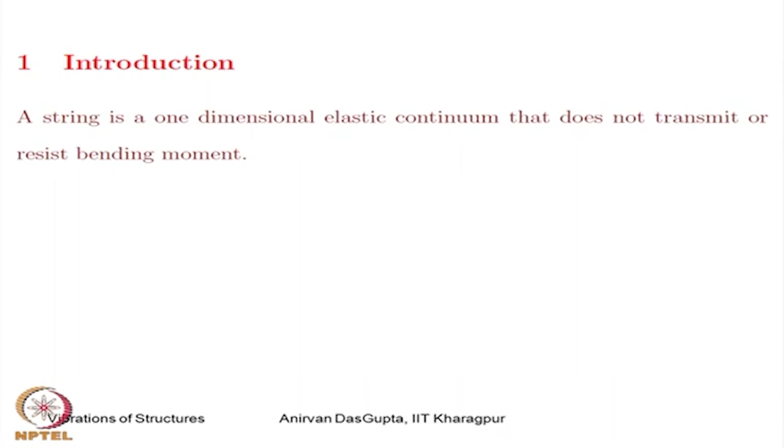Now I will show you some examples of strings. This is an ordinary tag which is like a string because it satisfies the definition I gave you: it is a one dimensional continuum and does not resist bending in any way. Whatever shape I give it, it will retain that. The restoring force comes when I make it taut. This tension that I give to the string acts like the restoring force. So the restoring force is produced by the tension in the string, otherwise the string will take any shape. It does not resist bending.

This is another example of a one dimensional continuum that also does not resist bending. This is a chain, a hanging chain, so this also qualifies to be a string. Here is a guitar string. Now, if I bend it, it restores back, as you can see here, but still this is called a string.

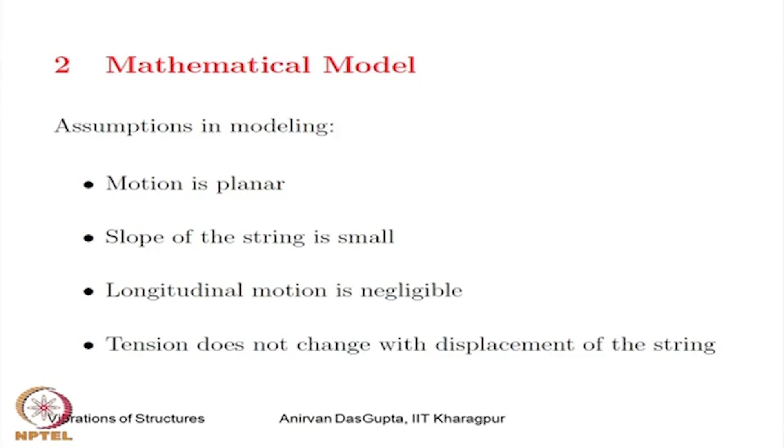So we start with a mathematical model. How do we model strings? In order to model strings, we will make some assumptions. Here I have listed some of the assumptions we make in modeling the string. The first assumption says the motion of the string is planar - I will assume the string vibrates only in this plane. Then, the slope of the string is small. So when the string deforms, the slope at any point of time is small.

The third assumption says the longitudinal motion is negligible. If we make a mark here and trace its motion as the string vibrates, you will find most of the time this mark moves transverse to the string. There is hardly any axial or longitudinal motion. This is our third assumption. The fourth assumption says the tension does not change with displacement of the string. So I have put some tension in the string, and as I displace it, the change in tension is negligible. With these assumptions, we can now start modeling our string.

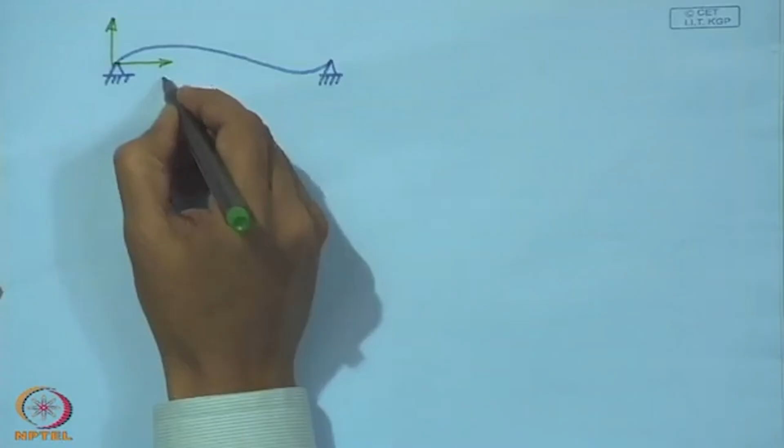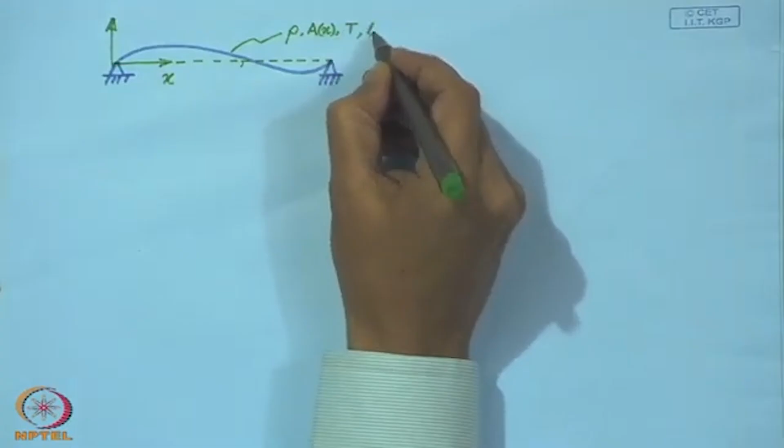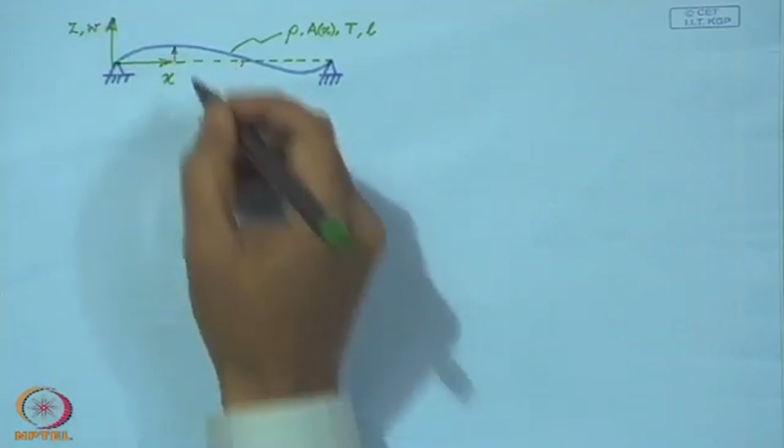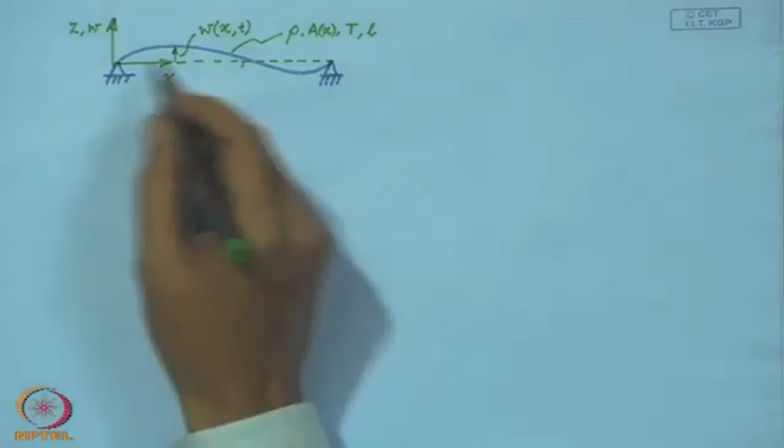Consider a string made of a material of density rho, having an area of cross section which may be a function of the positional coordinate x. It is under a tension T and has a length L. This transverse motion of the string is measured by the variable w at a location x at a time instant t. This shows a stretched, taut string which has been displaced from its equilibrium position, which is the x axis.

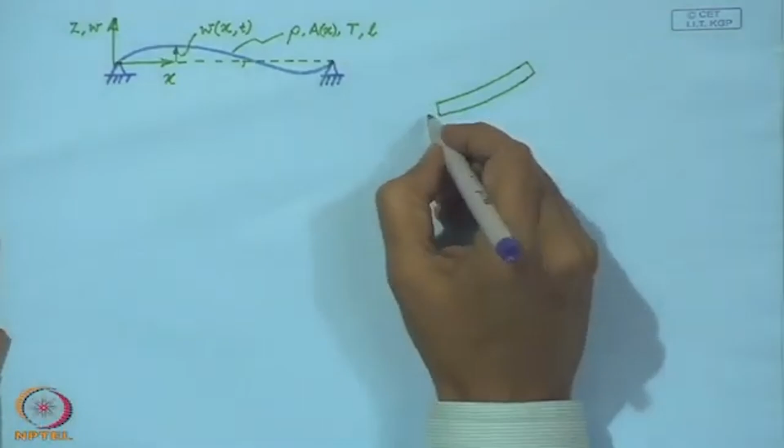Now, to write out the equations of motion, we will consider an infinitesimal element as we do in Newtonian mechanics. We will draw the free body diagram of this infinitesimal element. This element lies between the coordinate x and x plus delta x.

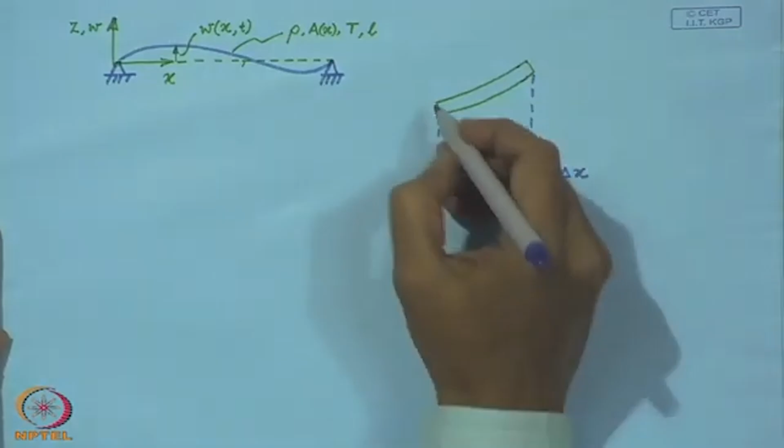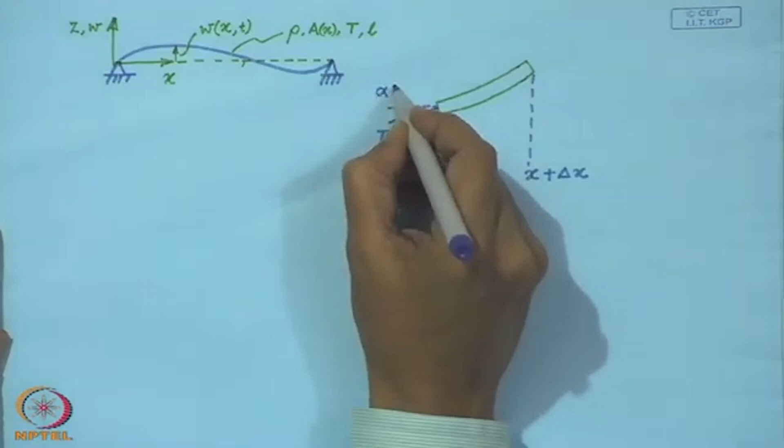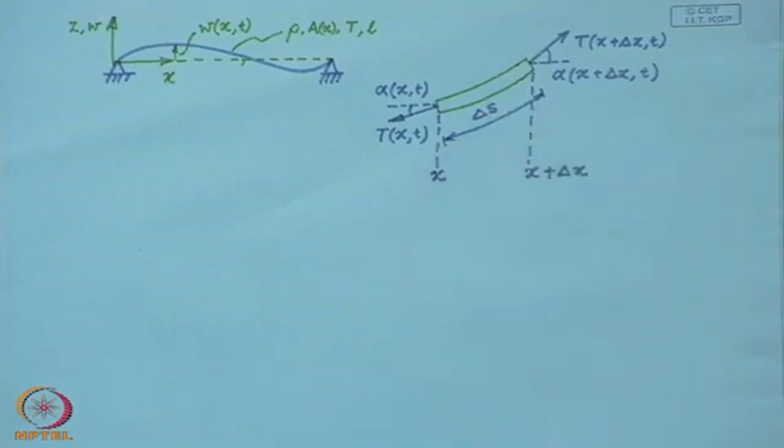On the left, it is under a tension T(x,t), and it makes an angle alpha. On the right end, the tension is T(x plus delta x, t), and the angle it makes is similarly alpha(x plus delta x, t). The stretched length of this element is delta s. Now, to begin with, we are going to write the equations of longitudinal dynamics of this infinitesimal element.

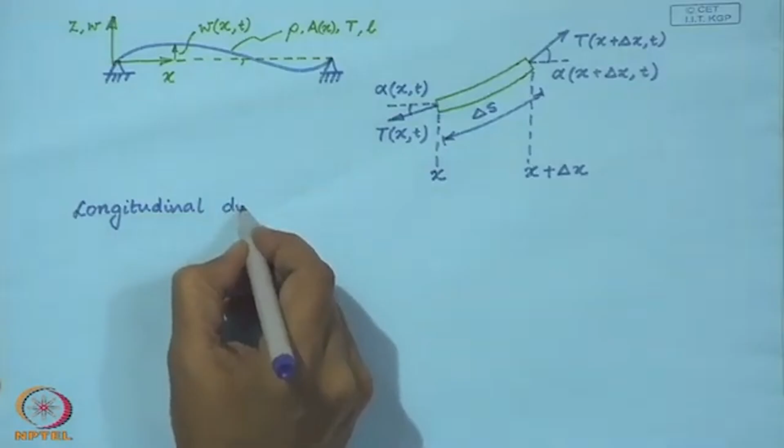Now, as we have assumed that the longitudinal motion of this element is negligible, we will neglect the inertia force, that is the acceleration in the longitudinal direction. So then the longitudinal dynamics reduces to just a force balance equation in the longitudinal direction. Let me write out this force balance equation.

So, is the tension at this right end, cosine of the angle, minus the tension at the left end times the cosine of the angle.

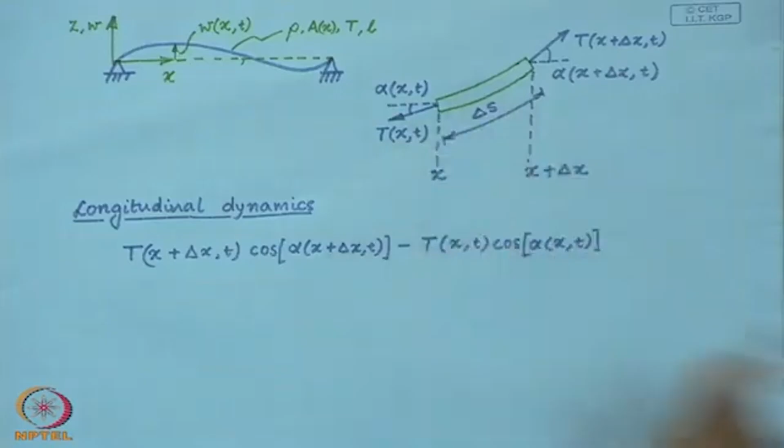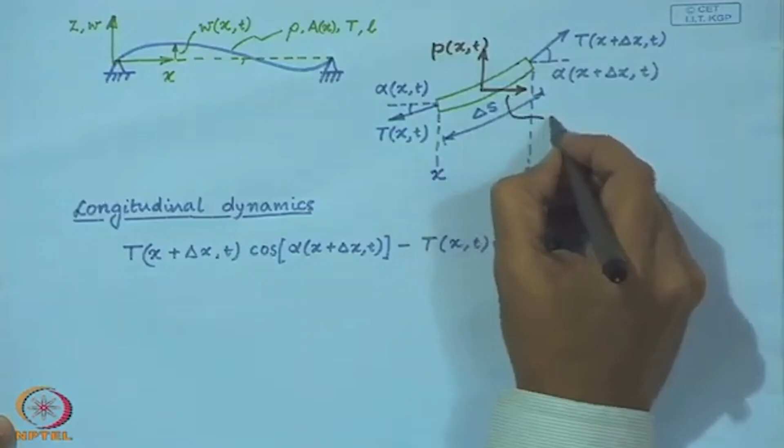And along with this, you may have some external distributed forces. So you may have some external force distributions as I have indicated here. These are force per unit length of the string. So in the longitudinal direction I have, for example, this n x comma t. I will introduce that also in this equation, and that must be equal to 0.

Now, if I divide this whole equation by delta x and take the limit delta x tends to 0, that will imply...

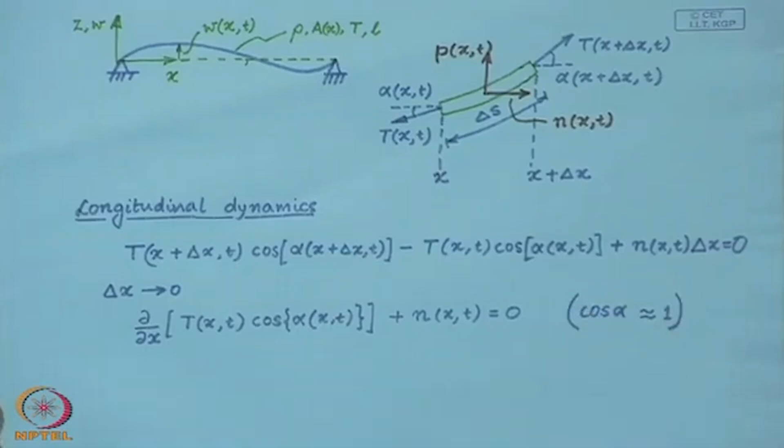Now, we have assumed that alpha, the angle made by the string, is very small. So I can safely assume that cos alpha is almost 1. So if I make this simplification or this assumption, then this equation simplifies to...

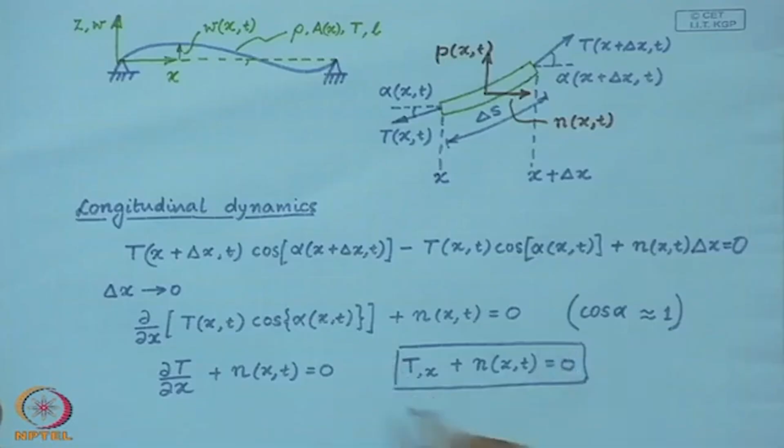Now this I will write in a shorter form. So this comma x in the subscript would indicate a partial derivative with respect to x, and we are going to follow this notation throughout this course. So this then is our equation for the longitudinal dynamics, which is essentially a force balance equation.

Now, we are going to look at the transverse dynamics. So I am going to use this free body diagram for the transverse dynamics.

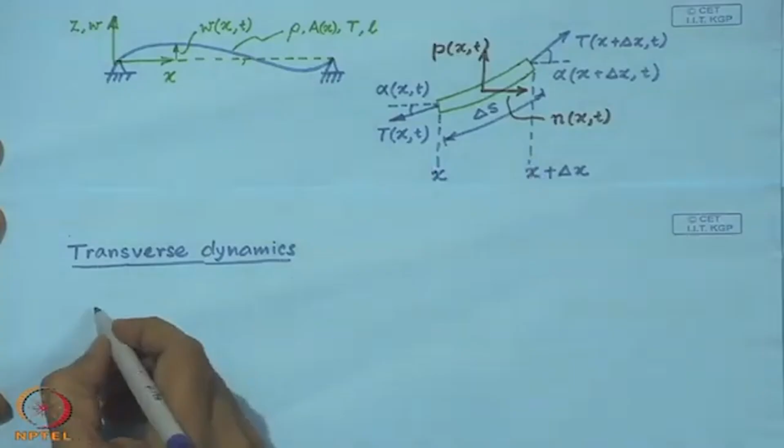So, if I write out the equation of motion, the mass of this little element can be written as rho times A, the mass per unit length, and the length of this element is almost delta x up to a linear approximation. So rho A delta x would be the mass of this little element times its acceleration, which I will now write, since w is the motion in the transverse direction. So w comma t t indicates the acceleration, it represents the acceleration of the element in the transverse direction.

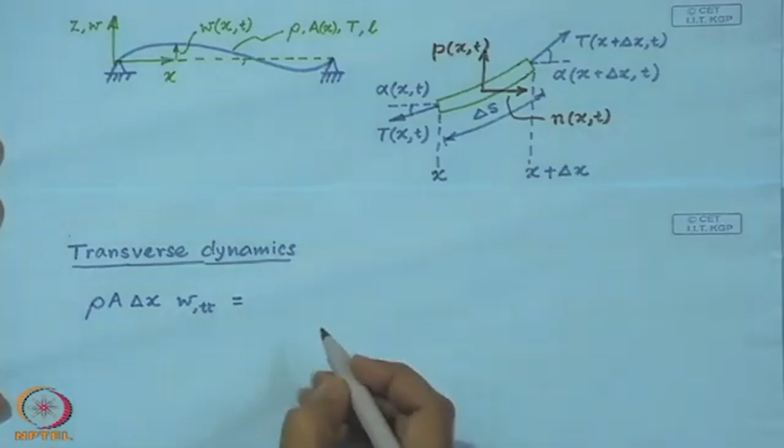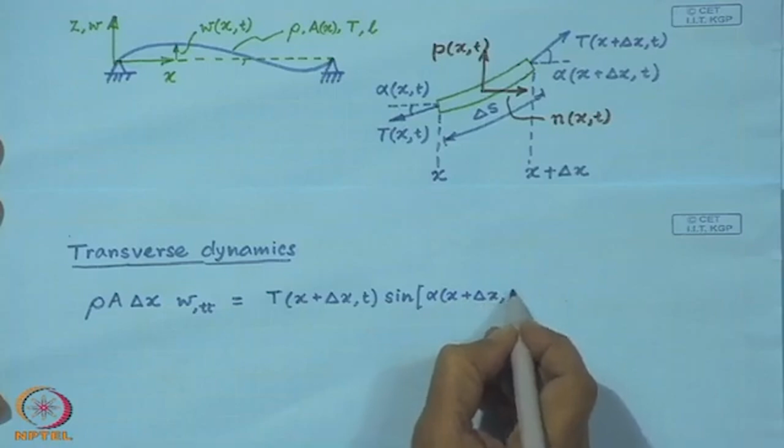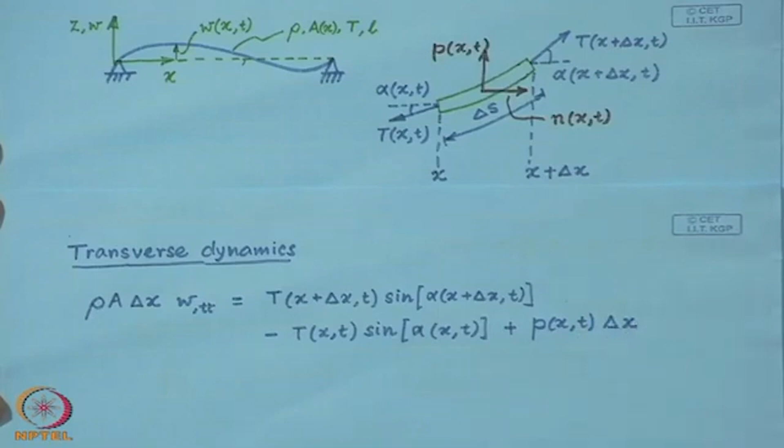So mass times acceleration, that must be equal to all the forces in the transverse direction. So on the right hand we have... on the left hand we have minus T(x,t) sine of the angle at the left hand, and plus the distributed force in the transverse direction. Now, if I once again divide this whole thing by delta x and take the limit delta x tends to 0...

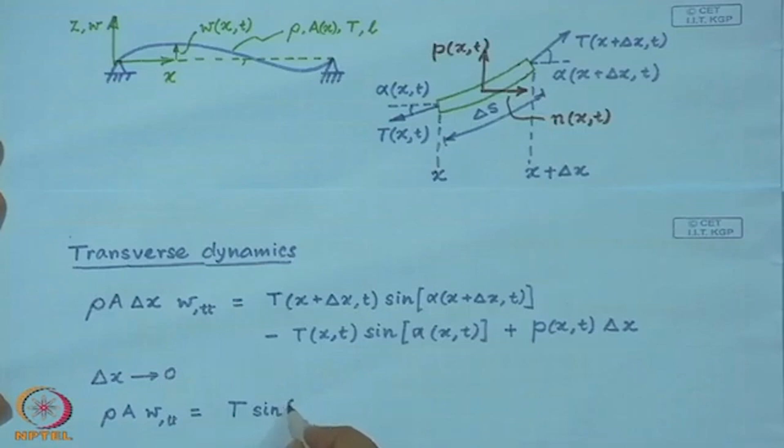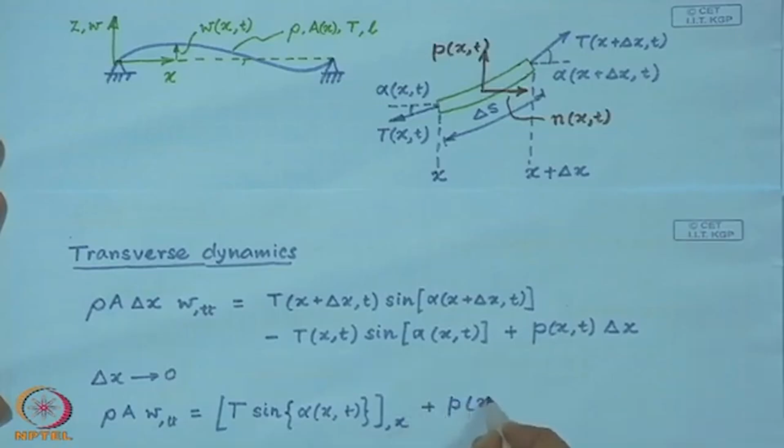So I have the partial derivative of this term with respect to x.

We have again assumed this alpha to be very small. So let us see what sine alpha turns out to be when alpha is small.

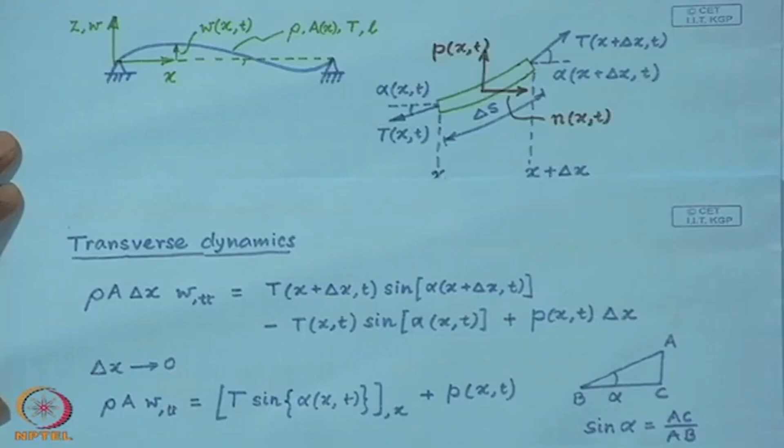...the tangent of the angle alpha, and this tangent of alpha can be very easily seen to be del w del x. So by using this approximation up to the linear order, I can safely write sine alpha almost equal to del w del x. So if I make this substitution here...

And make some rearrangements, I obtain the equation of motion of transverse dynamics of a string.

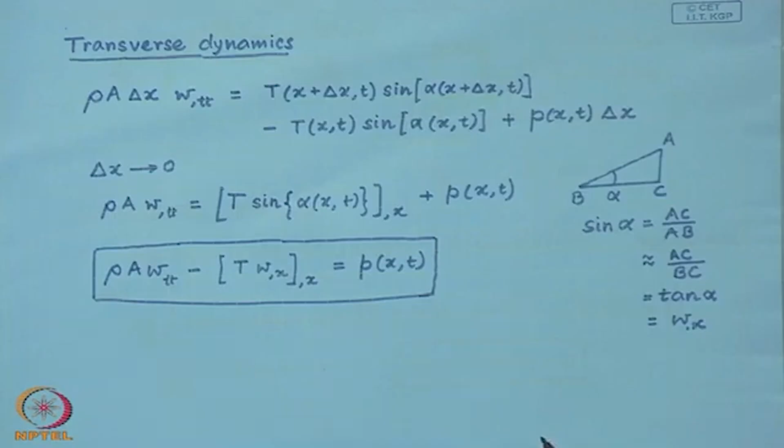So finally, if I look at this slide, here I have put together these two equations that we have just derived. So the boxed equation is the equation of transverse dynamics, where this tension may be a function of space and time if there is an external distributed force n.

Now, this equation of motion is a partial differential equation, it is a linear second order hyperbolic partial differential equation.

Now, to solve this, we need boundary conditions and initial conditions. As you know, since we have second order in space and second order in time, we will need two boundary conditions and two initial conditions.

So let us see, first why do we need these conditions? So briefly, this equation of motion, as we have seen, is derived by considering an infinitesimal element of the string. This in no way tells us how the string is connected to the ground, or if at all it is connected to the ground. So we will need the description to complete the physical description of the whole system. So we will need these boundary conditions at the two ends of the string.

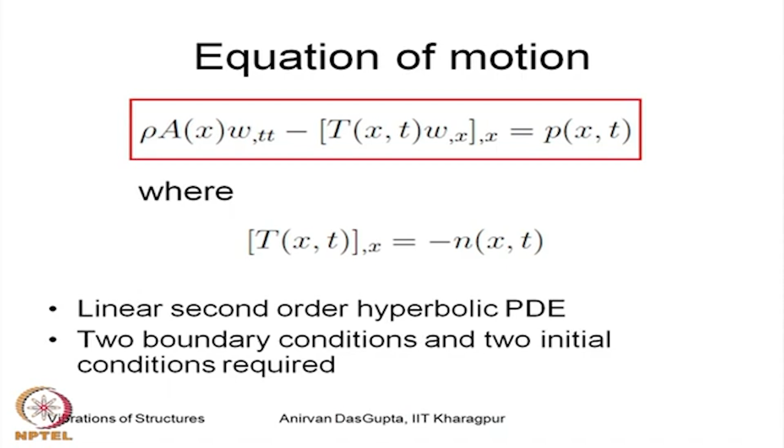Now, mathematically, if you want to understand this, you see this equation is second order in space, so the space derivative is of second order. So upon integration, we will generate two constants of integration, and hence to determine these constants of integration, we need the two boundary conditions. In a similar manner, when we integrate the time part, we will again generate two constants of integration, which will be solved from the two initial conditions that are provided.

So the boundary conditions therefore complete the description of the system, and they are used for determination of the constants of the spatial integration. Now, these boundary conditions are of two types.

The first type is known as the geometric or essential boundary condition. Such boundary conditions are fixed by the geometry of the problem. The second is the dynamic or natural boundary condition, which comes because of some condition on the force or moment. Mostly in a string, it will be force. So the dynamic or natural boundary condition is a result of some force condition on the string.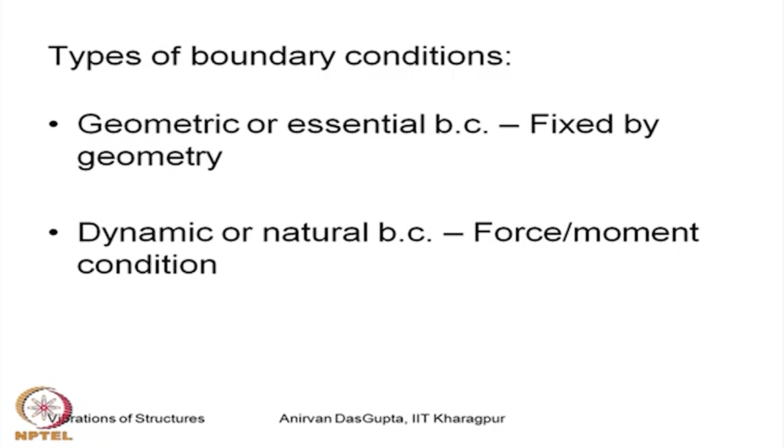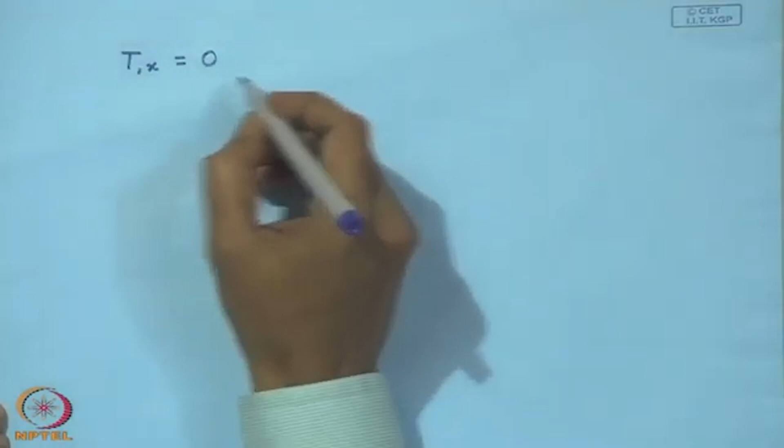Let us look at some examples. This shows a uniform taut string which I drew before. You can immediately see that the partial derivative of the tension in the string is 0, since there is no external force in the longitudinal direction of the string. Therefore, this is our equation for the tension, which implies that tension is a constant.

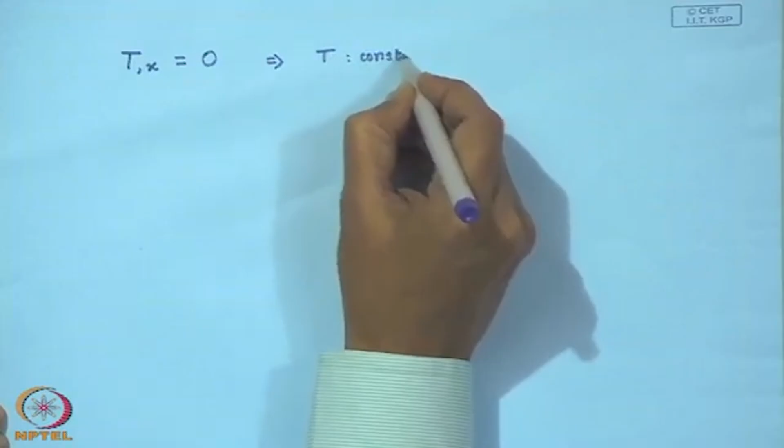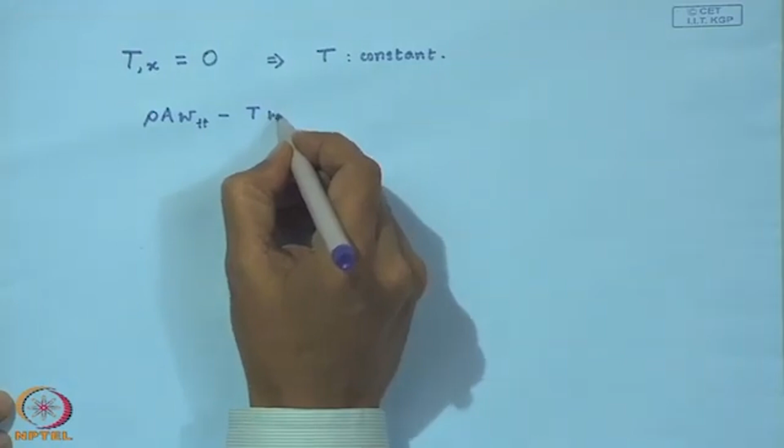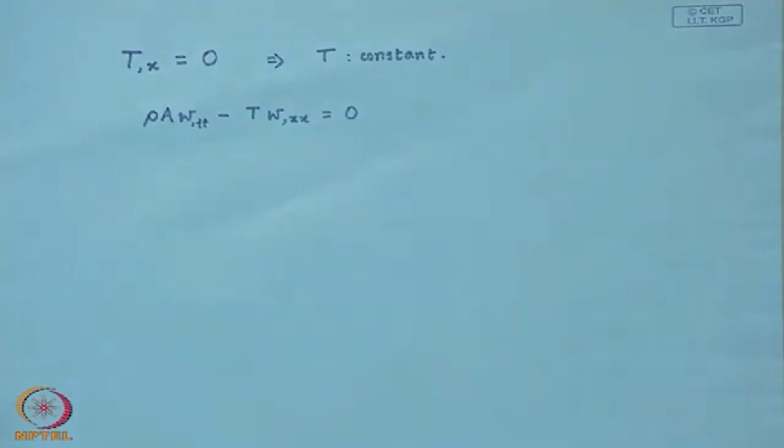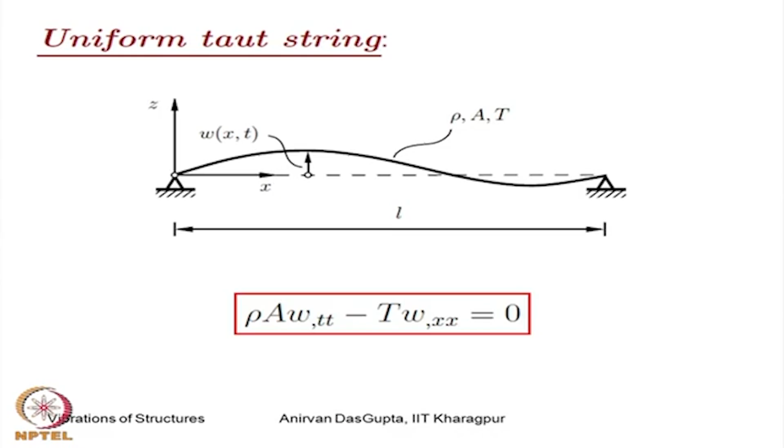So if the tension is constant, our equation of motion reduces to this, considering there is no force even in the transverse direction. We see in this slide that the equation of motion is given by this boxed equation. So this is the equation for a uniform taut string with no external forces.

Now the boundary conditions. This is very simple. From geometry you can easily identify that at the left boundary and the right boundary, the displacement of the string must be 0. These boundary conditions are set by the geometry of the problem. So the geometry says that the transverse displacement of the string at the two boundaries must be 0. These are the geometric boundary conditions for the string.

Next, we are going to look at a string with a free or sliding end. Here, as you can see, the equation of motion for the string remains the same as discussed before, since the string is uniform with no external forces. But the boundary condition at the right boundary is what we want to now see.

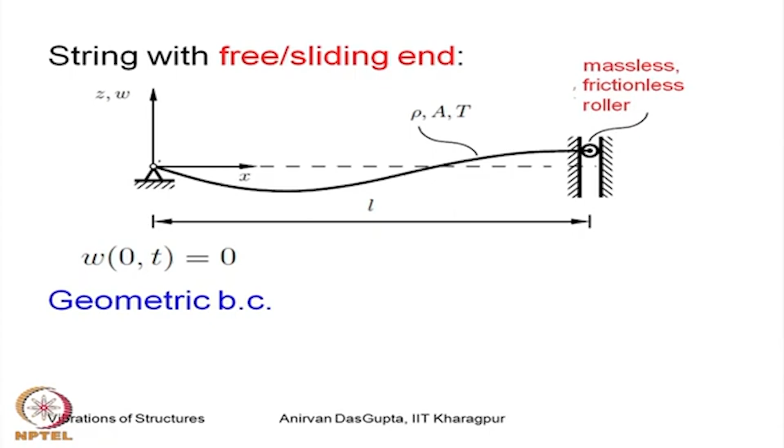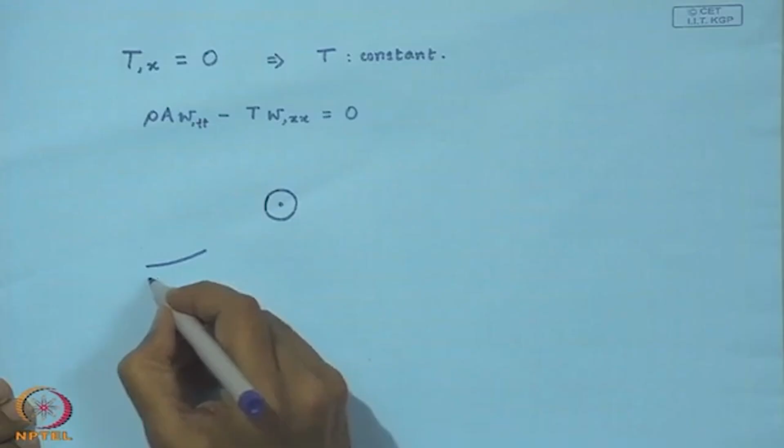At the left boundary we again have a geometric boundary condition, which is that the displacement is 0 at x equal to 0. To understand the boundary condition at the right boundary, let us look at it in a little detail. This is a massless frictionless roller to which this string is attached. Now I will draw the free body diagrams of this connection.

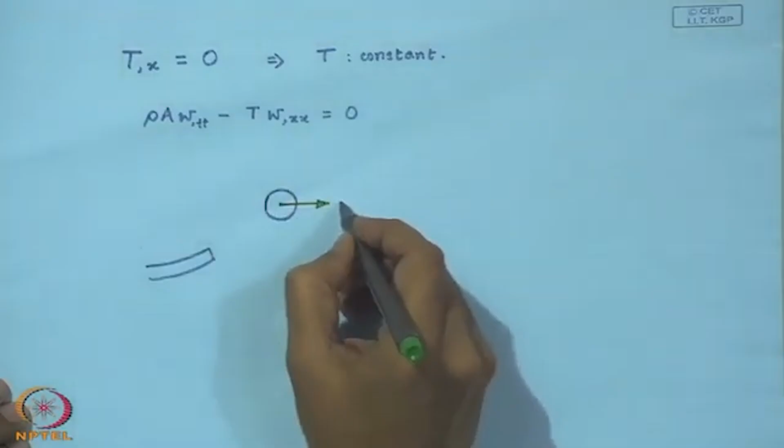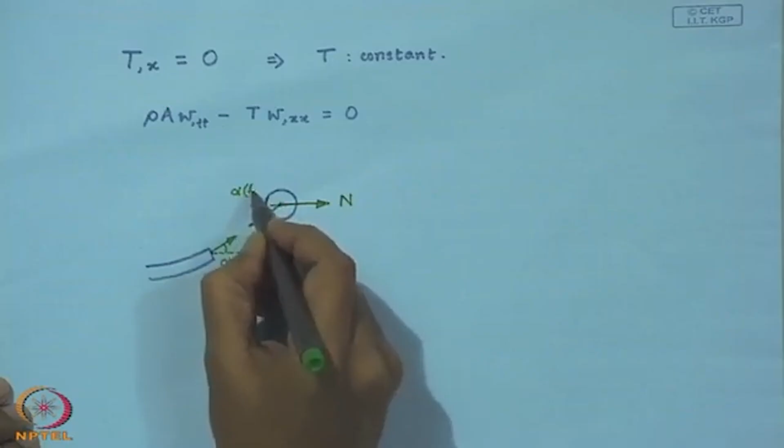At the pulley you have one normal force from the guide, a frictionless guide, so there is only one normal force, and from the string we have this tension at x equal to L. If alpha is the angle at an instant at this end of the string, then we can see from the free body diagram of the pulley that we can write down the equations of equilibrium for this pulley.

So I will write out the equation of equilibrium in the transverse direction for this pulley. This pulley is massless and frictionless, so we have this, which turns out to be 0. So what this essentially tells us is that the force in the transverse direction on the pulley has to be 0. Now if I use the approximation that we have discussed, I obtain this condition.

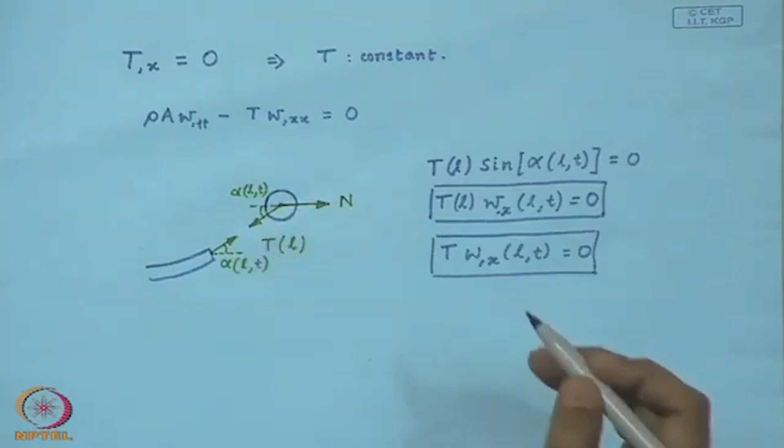Now it so happens that the tension in this string is uniform, so this can be written even further in this way, and this becomes our boundary condition at the right end. This condition comes from a force condition, that the force in the transverse direction on the pulley must vanish.

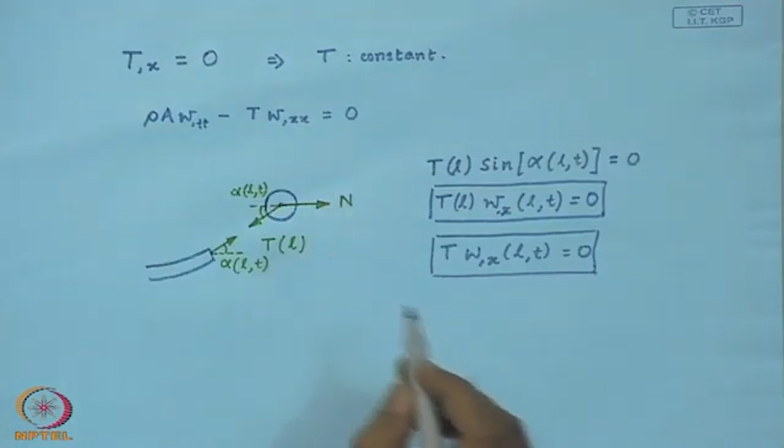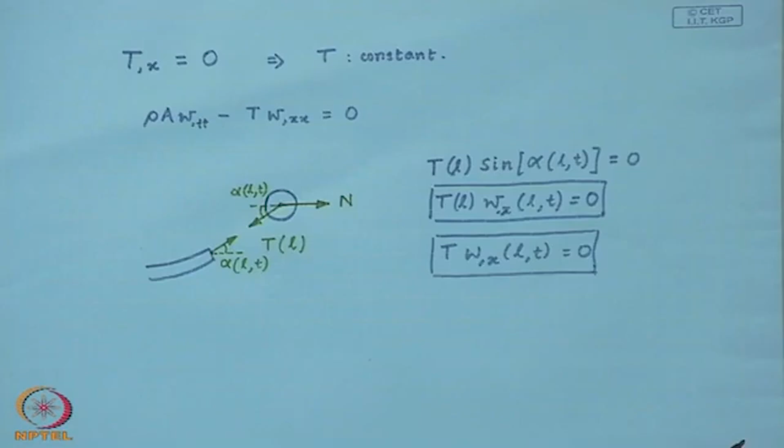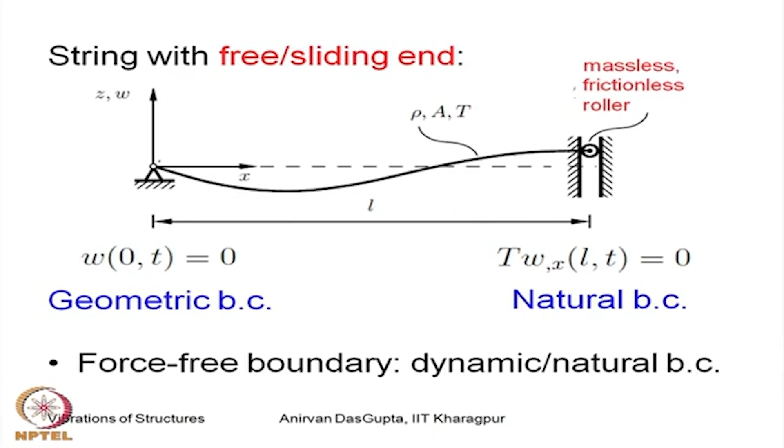If you take the force balance in the longitudinal direction, you will be able to solve for the normal reaction on the wall. So the boundary condition, as we can now see on this slide, is given by tension times del W del x at x equal to L, and at all time t, must vanish. Such a boundary condition is known as a natural boundary condition, since it comes from a force condition. So a force-free boundary gives us a dynamic or natural boundary condition.

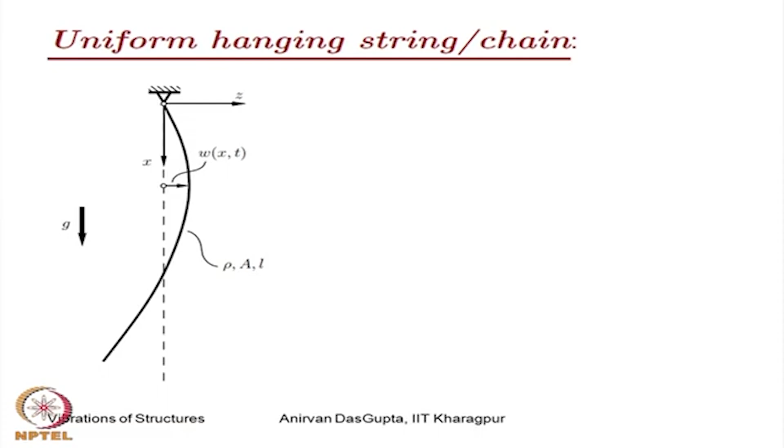Now let us look at a uniform hanging string or a chain. As we have discussed, a chain qualifies to be analyzed like a string. So the equation of motion for this chain can be derived like this.

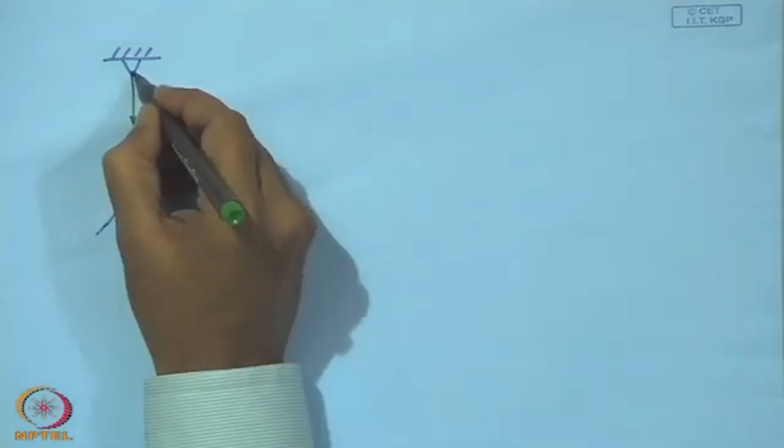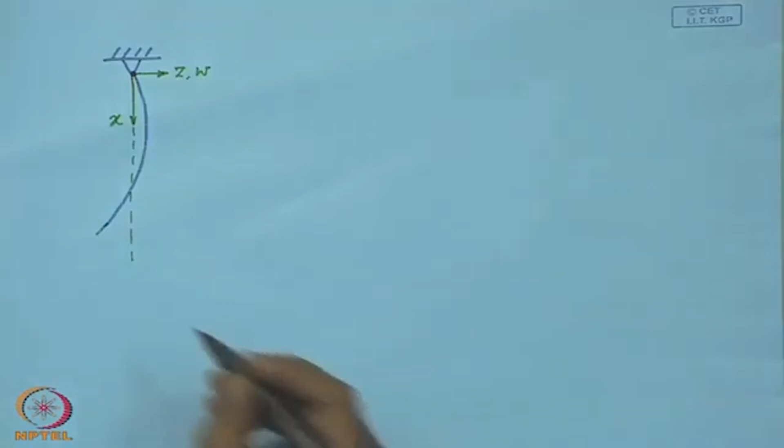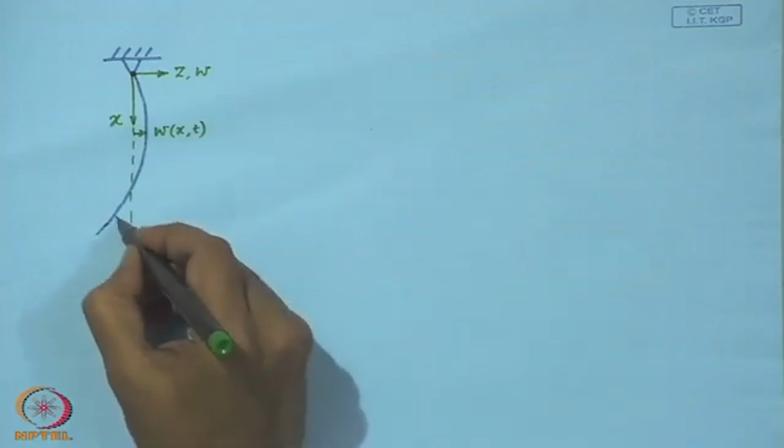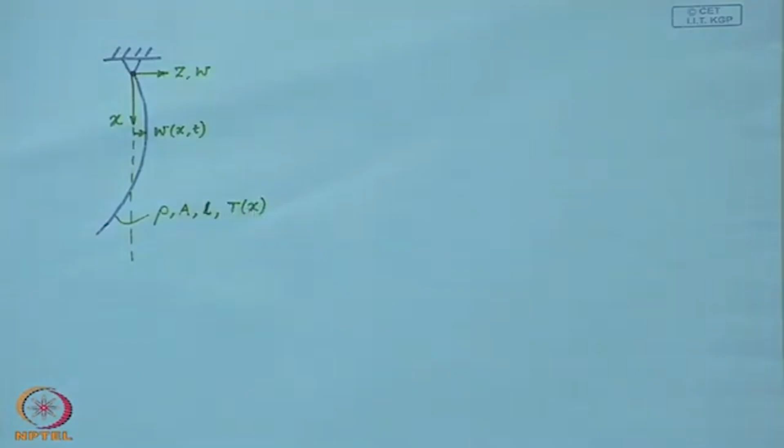Here I show a hanging chain which is made of a material of density rho. Its area of cross section may be assumed to be uniform for simplicity, and its length is L. Now, as you can realize, this chain will be under varying tension, so the tension in the chain will be a function of the position coordinate x.

So, this is what we have to now determine. We already know that this is our equation for the longitudinal direction, the force balance in the longitudinal direction. This is force per unit length, N is the force per unit length in the longitudinal direction.

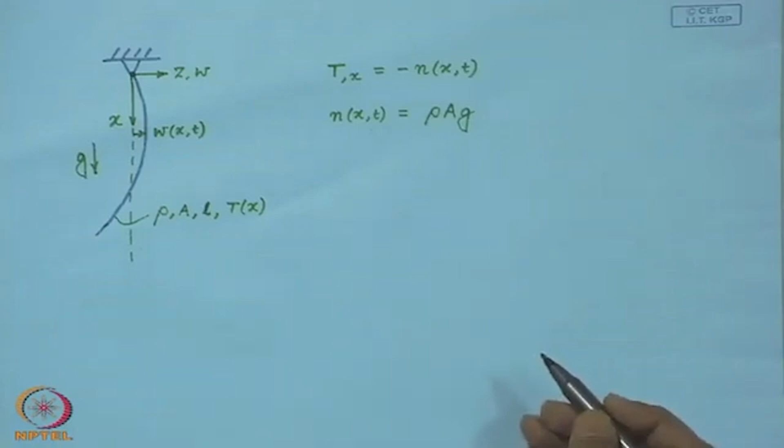If the density of the chain is rho and area of cross section, assumed to be uniform, is A, then rho A is mass per unit length. If I multiply by the acceleration due to gravity, assuming a uniform gravitational field, the longitudinal force distribution or force per unit length of the chain is rho A g. This is weight per unit length, so it is the force per unit length in the vertical direction in this case.

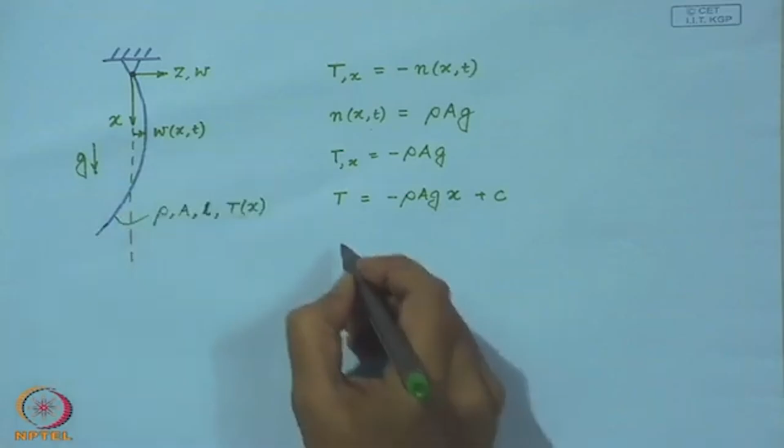So, if I substitute this and integrate out, that is what I have, the tension as a function of the coordinate. Now I will use a boundary condition at one of the ends of this chain. It is convenient to use this condition, that the tension at x equal to L is 0. That gives us C, and if I substitute back, this is the tension at any point x in the chain.

Now I will substitute this expression in the equation of motion of the transverse dynamics, which reads, to obtain, and which can be simplified further. So, this is the equation of motion of transverse dynamics of a hanging chain in a uniform gravitational field.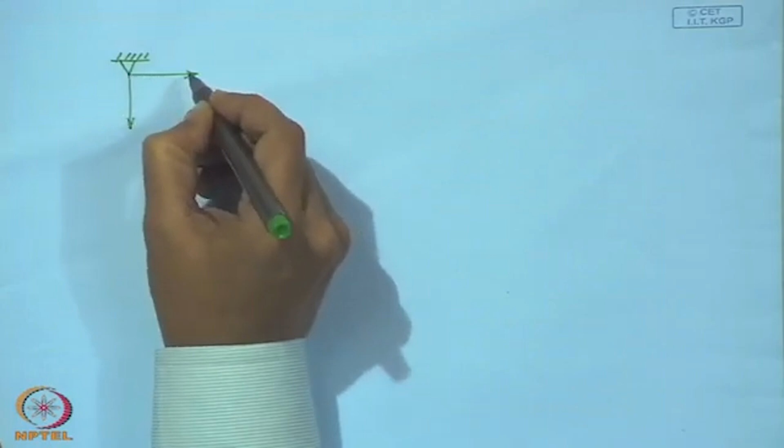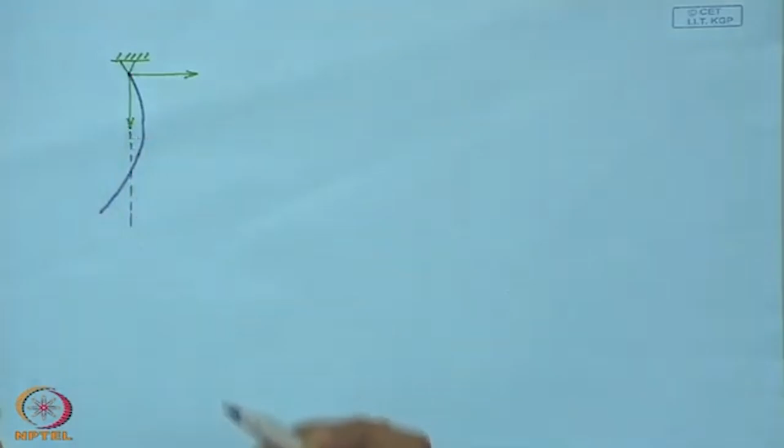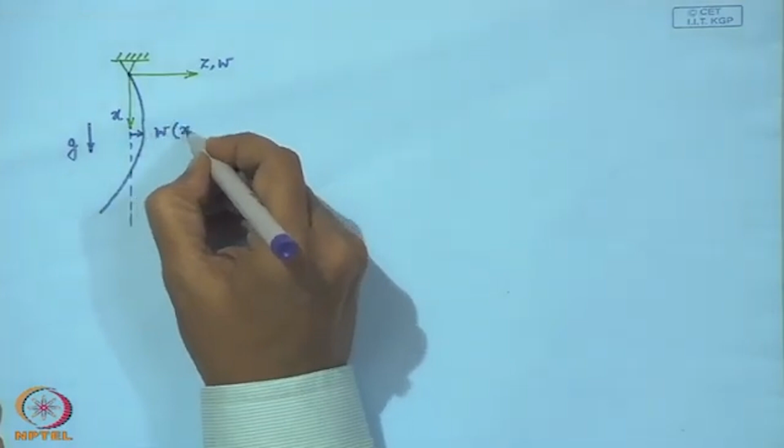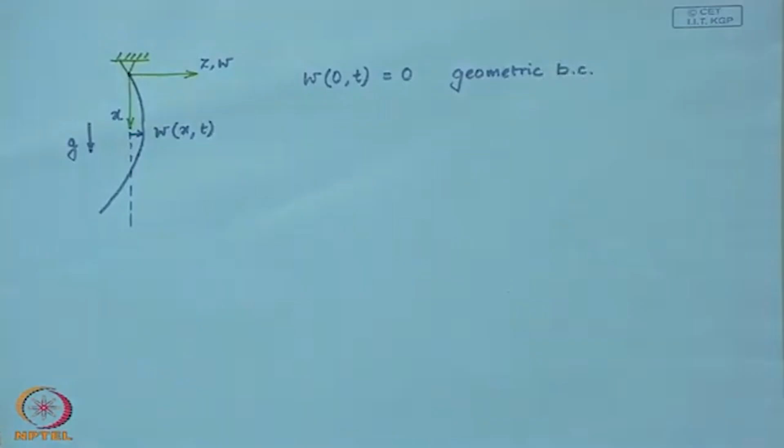Now, again we will need boundary conditions to complete the description of the problem. So, let us look at the boundary conditions for this chain. At x equal to 0, as you can see, we have a geometric boundary condition. Now what happens at x equal to L? What is the boundary condition there? This is a free end of the string, and it is free to swing.

So, one may write in a manner similar to what we have discussed before. This was the force free condition, so no force in the transverse direction, but remember this tension at this free end is also 0. So if you imagine the last particle of this chain, it has almost no restoring force, because in the string the restoring force comes from this tension.

Now at this free end of the string, the tension goes to 0. So the last particle of the string hardly has a restoring force in the transverse direction. So there is a possibility, at least theoretically, that this displacement might become infinity, since it has no restoring force. But we know from observing a hanging chain or vibrating chain that it does not go to infinity, it remains finite. So from physical considerations, we must have a finite solution at this end.

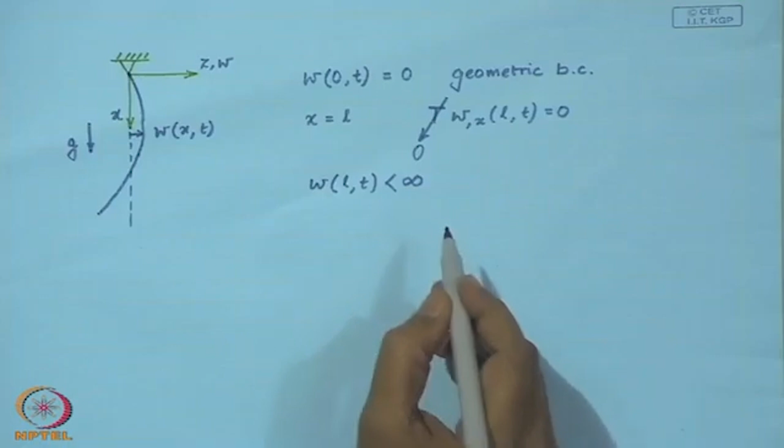So we write this in this form, as an inequality. What this says is that the displacement of the string at the free end must be finite. Now, when we discuss the solution of the vibration problem of a hanging chain, we will see that there is a solution which has an infinity. What this condition tells us is that such a solution should not be present, because from physical considerations we must have a finite displacement of this free end. We will elaborate on this when we discuss the solution of vibration of a hanging chain.

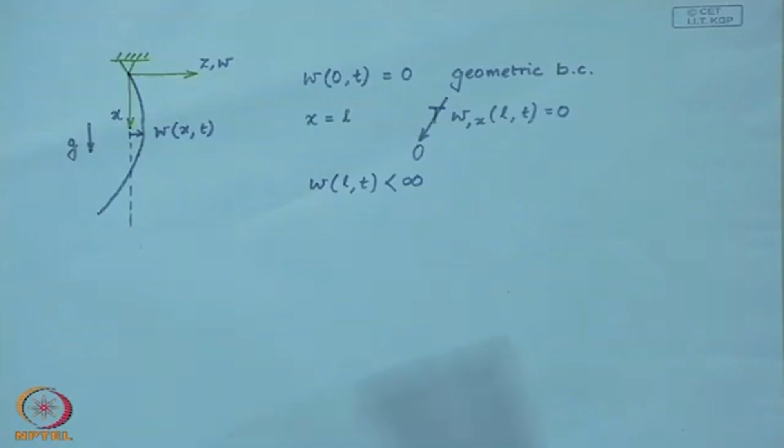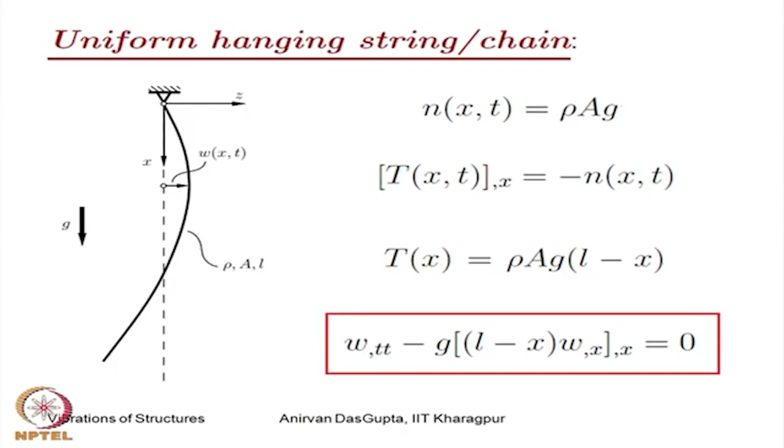So let us see what we have discussed in this lecture. We have started with modeling the equations of motion of a string, both transverse and longitudinal. In the longitudinal direction it is a force balance, since we assumed the motion in the longitudinal direction is negligible. Then we derived the equation of motion in the transverse direction of the string, assuming it to be planar. Then we looked at the boundary conditions that come up in transverse vibrations of strings.

There are two kinds of boundary conditions, as we have seen: the first is the geometric boundary condition, the second is known as the natural boundary condition or the dynamic boundary condition. We have then seen a few examples of taut strings, and looked at the dynamics of a hanging chain, and in each case we looked at the boundary conditions that govern the description of the system. Now, along with the boundary conditions, we also need the initial conditions, which we have not discussed as yet.

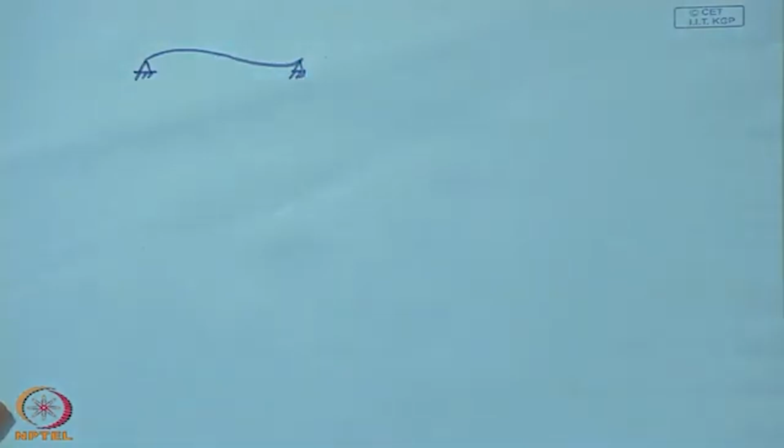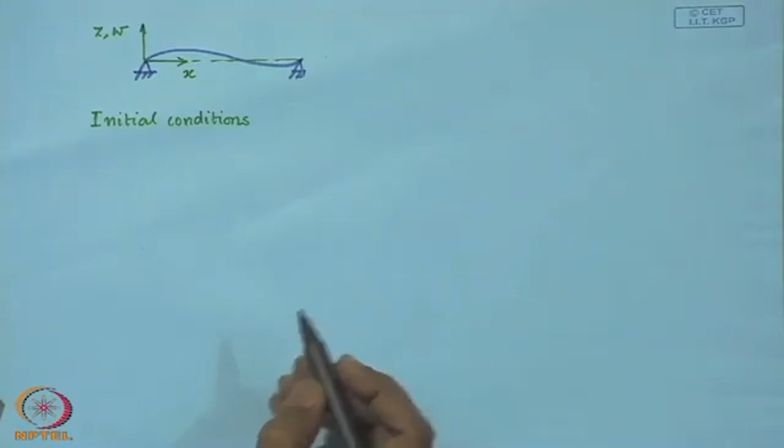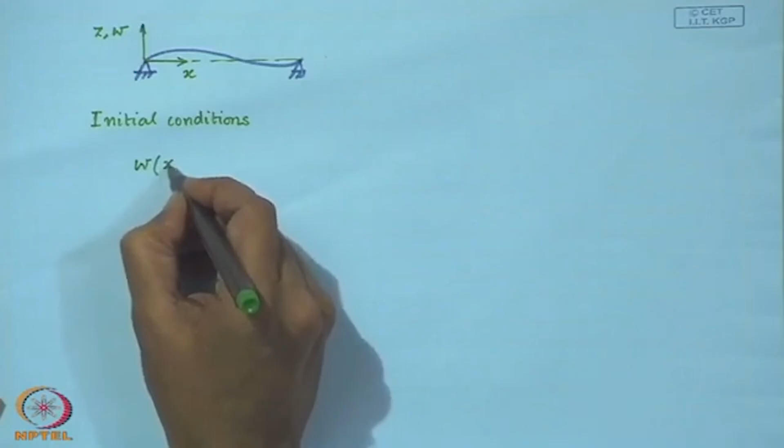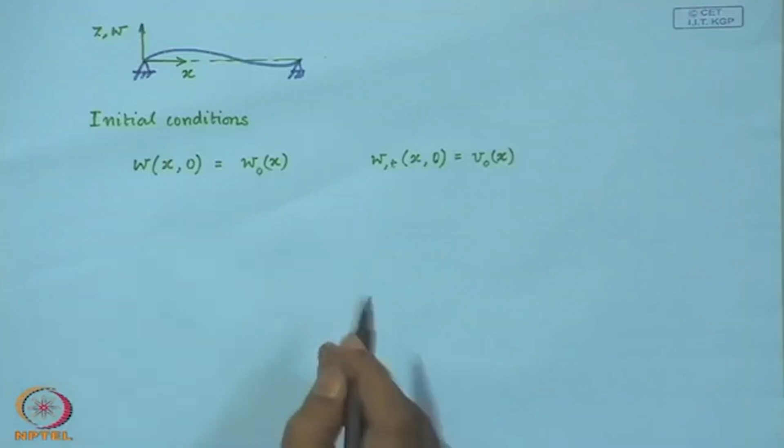As I mentioned, we need two initial conditions. These initial conditions are usually specified as the initial deformation of the string and the initial velocity distribution over the string. So with these two initial conditions, one on displacement, the other on velocity, we can now completely and uniquely solve the equation of motion of a vibrating string.

So with this, we complete this part on the transverse vibrations of strings.